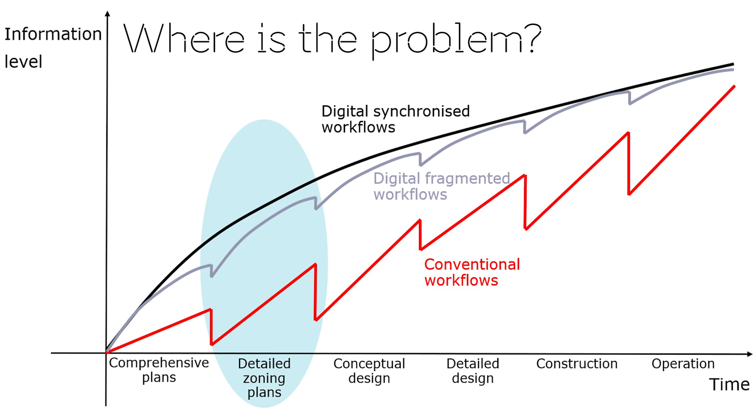And of course, somewhere there - let's see if the laser works on the screen, no - we have the building permits, we have the detailed zoning planning, etc. And how do we actually address these things?

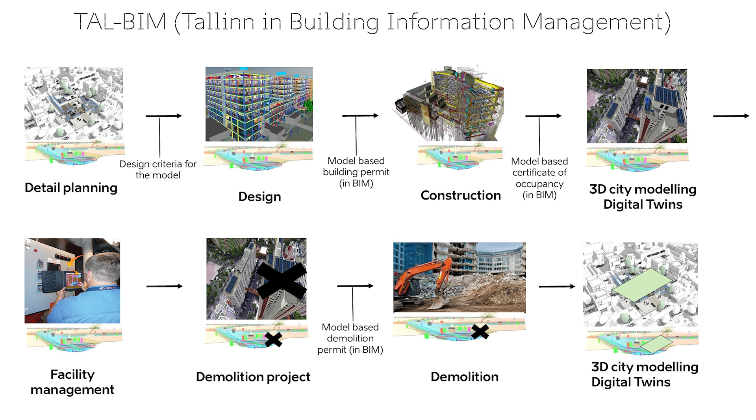For example, in the City of Tallinn, we call this process TAL-BIM. We start from the detailed planning, already using some kind of information models for this. Then when we go to the construction design level, after the conceptual design for our own buildings, we demand that these buildings get the BIM-based permit. But for buildings in the City of Tallinn that are not owned by the municipality, we cannot make this compulsory - it's like, if you want to use it, you can use it. And of course, there's the city's digital twin in place where we transfer that information, which we use for facility management, etc.

But if we go to the central government, what is the role of government? How can the central government really address this problem, address these information gaps? Of course there are the three traditional pillars: education, legislation, process improvement. But there is another solution.

For example, in Estonia we created a digital platform, what we call the e-construction platform, for better information flow. What this e-construction platform really is, is the idea and mission that we have to transfer the data, and exchange it so it's lossless, and the data itself needs to be standardized. And who benefits? All the stakeholders in the process.

So what really is the construction platform behind that wonderful idea? I'll explain it through examples where we have the data layer, the service layer, and the user interface layer.

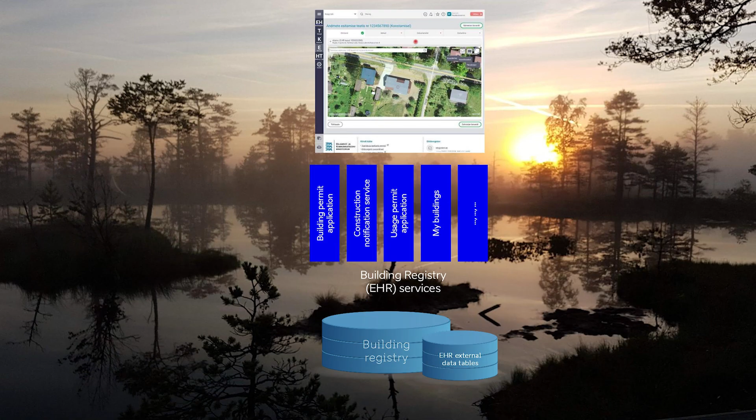The central core of the construction platform is the building registry, where we have data about the buildings and also the procedural environment of building permitting. We also have data about underground structures, and now we're putting that into 3D.

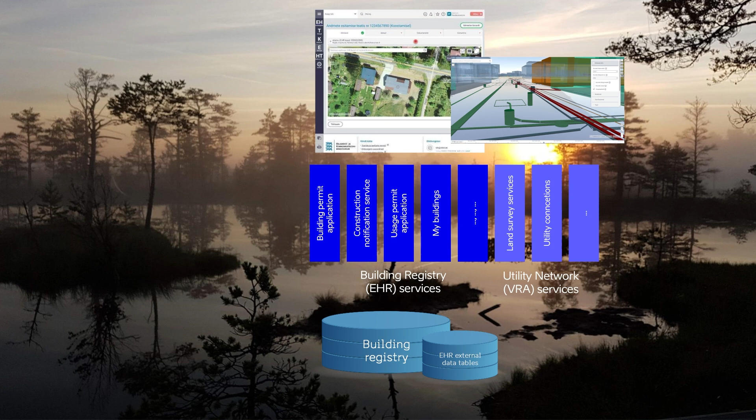Then we have BIM services like BIM-based permitting, and an entire national digital twin that we can address and access. There are a lot of different databases connected to it.

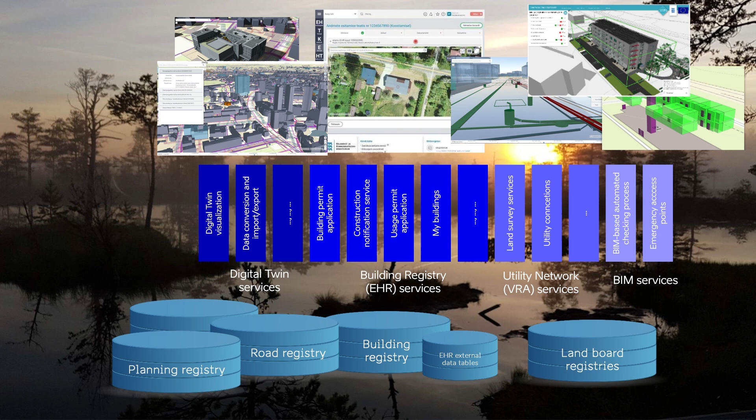We call it the X-road connection, so the data is always with its source, and it has to be like that. We're also addressing information from different fields, like from the Ministry of Finance, who is responsible for spatial planning.

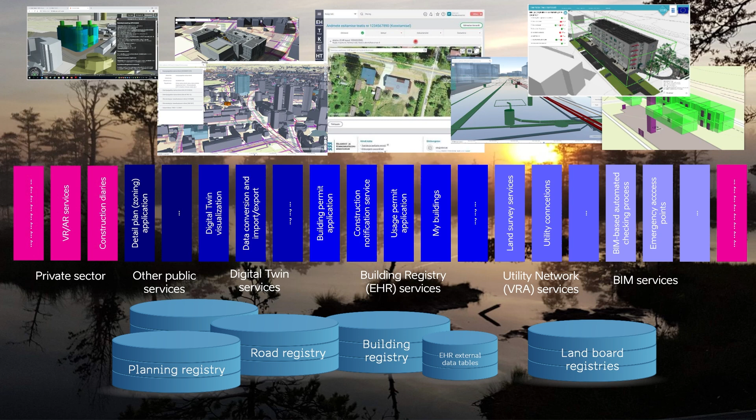We're getting these kinds of services onto the construction platform, and we're also opening the platform up for private sector services, which are very good services, but it doesn't make sense to fund them from taxpayers' money because they're beneficial for only the selected few.

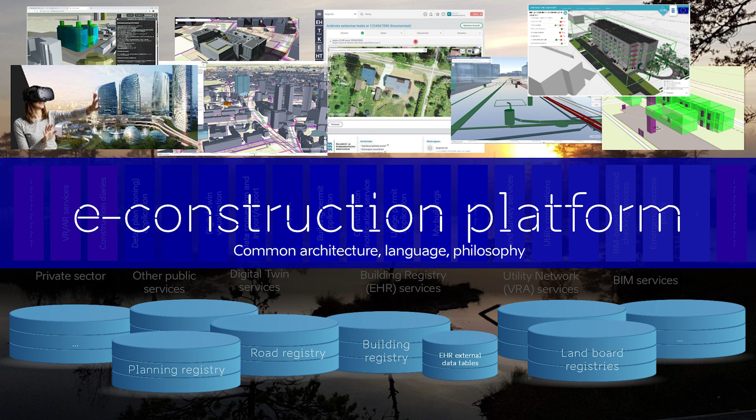So if some company wants to monetize a service, they can use the e-construction platform to do it. What this e-construction platform really is, is this kind of umbrella of different services which has a common architecture, language and philosophy, and of course the style guide as well.

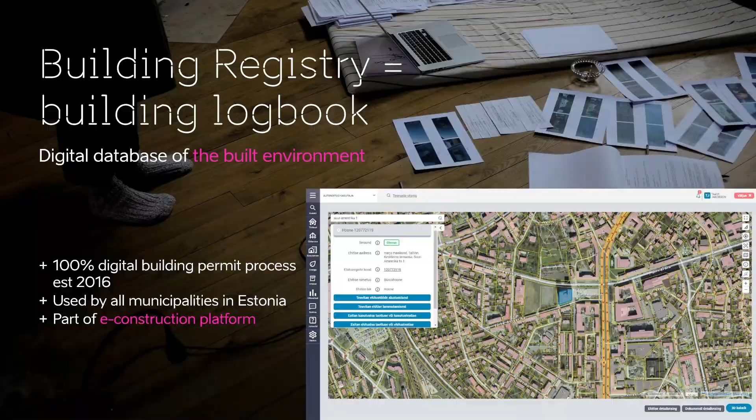But closer to the topic, when we're talking about permits, we have this e-permitting system already in place from 2016. We call it building registry, but internationally it's mostly called a building logbook. In this building registry, we also have a procedural environment so you can get building permits.

Because we have the data, we can access this data, and we also have an information portal where you can get all the statistics about these buildings.

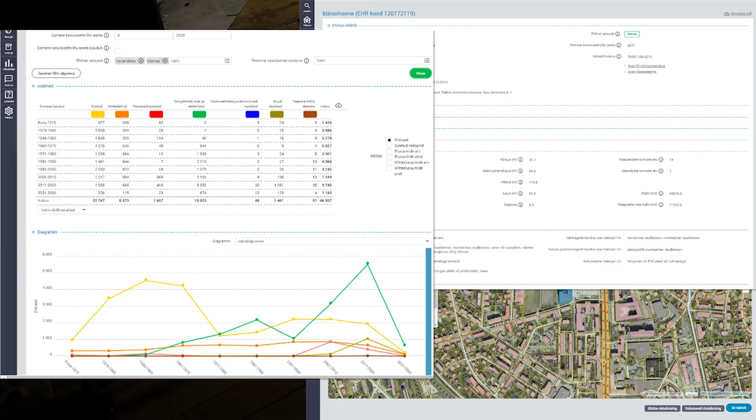So how does it really work? If you want to get a building permit, you just address the building registry. Then the local municipality who has to process the permit gets a notification, and they will start the process there.

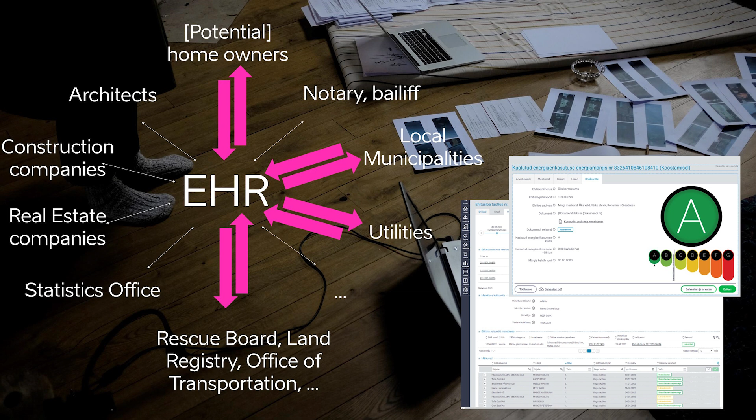They will also add tasks to the utility network owners, the rescue board, and other state agencies. They give their remarks within this environment. Then the local municipality also gives their remarks, and if everything is finally correct, you just get your building permit.

But about these building permits, why do we need them? Yes, of course, to ensure safety, legality, and efficient resource use. But it's also a key process in the building life cycle, because it's an obligatory thing you have to do.

It's not that you wake up in the morning thinking, what a wonderful day, what do I really want to do today, how about one building permit? Nobody thinks like that, of course. This is something you just have to have.

But at the moment, the process is quite expensive, time consuming, and if you want to solve it, usually it's more manpower, more money to enforce it with brute force. But there is a better way.

And what is this better way? It's this kind of BIM-based building permit process. We started with it already in 2019, and we did a first proof of concept level.

Then we developed the software with our partners, of course. We didn't have an in-house IT development team, so it all went through procurement. And from 2024, it's live, so the first building permits are already BIM-based in process.

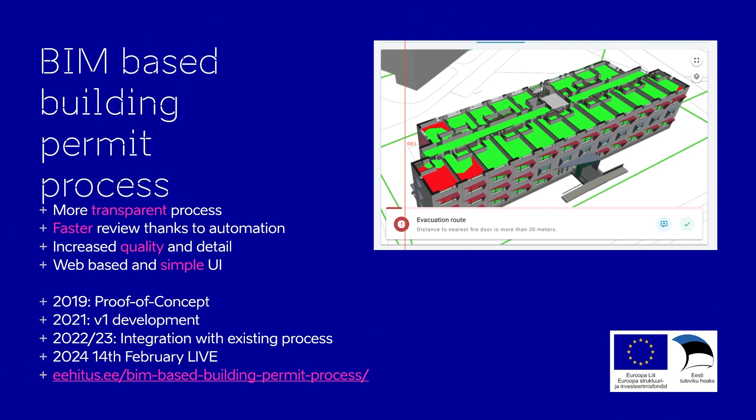There are 4 key elements: transparency, speed, quality, and simplicity. This is what we want to address with this BIM-based permitting. And of course there's automated rule checking and these kinds of things behind it.

And we are only using open standards, open BIM, only IFC. So no Revit, no ArchiCAD, no proprietary formats.

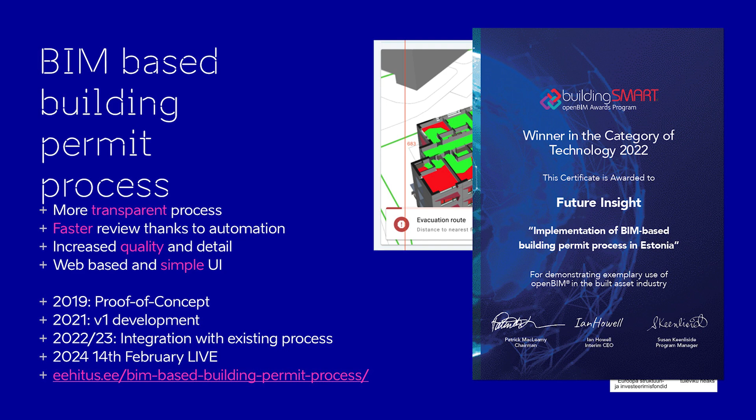This initiative was also acknowledged by Building Smart International, who gave Future Insight, our development partner, the award for the most promising technical solution in 2022.

When we want to get the BIM-based permit, we talk about this kind of automated rule checking. We also need common BIM requirements, because otherwise we cannot do automated rule checking if the data in one model is different than in another model. So we need this common language.

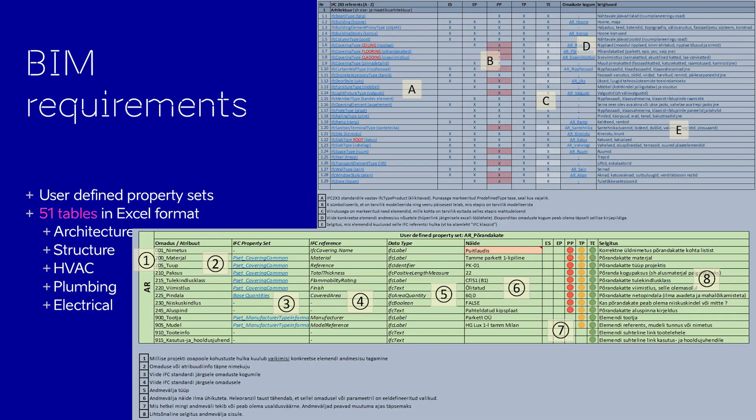For this, we have these user-defined property sets. At the moment they are still in Excel format, but we are in the process of implementing them into the IDS, the Information Delivery Specification Standard, so they would also be machine-readable. There are different parts. We have also integrated them together with the IFC standard so that, nevertheless they are in Estonian, they also have this IFC property sets and references.

This is how we can actually implement these things - if you want to get the BIM-based permit, you have to have your data according to these requirements. If you want to use different requirements, go ahead, but then you can't have this BIM-based permit, and you have to go for the traditional solution.

So about the lessons learned - what did we really learn about this process? You really need to get the right checks to start with, because when we started, we wanted to automate about 70 checks, and we ended up with 47, because some of them did not make that much sense in terms of benefits, and some were just too complicated to solve by technological means.

Also, these BIM requirements, if you are doing them, have to be very simple and clear. You always have to consider there are two sides - the designers, and the permit processors. If you're just pushing the data to the designer side, then all the time you're saving on the process side is being used up on the designer side. But there is mutual time - you have to find the balance so it would be as easy as possible.

And of course, when configuring these checks, you have to have a multidisciplinary team. You have to have architects and engineers who know what you're doing. You have to have the building permit processor to give insight into what they are controlling in rule compliance. And also lawyers and IT specialists so that all the rules are correctly interpreted. And of course, you have to keep this agile working process.

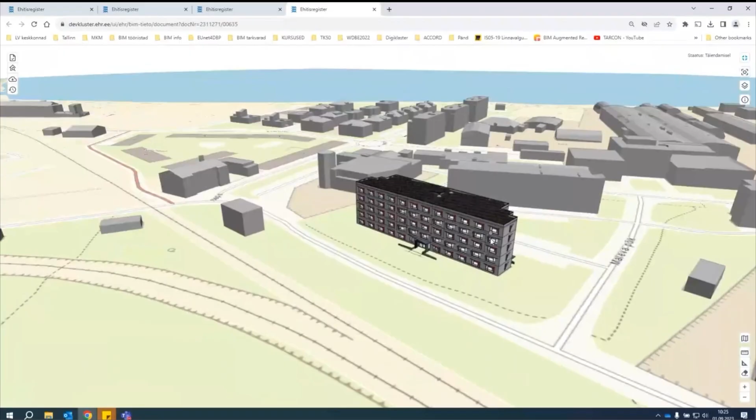Here's a quick video showing how this BIM permitting really looks. We have a model - in this example it's a 5-story building. All the background you see is taken from our national digital twin. So architects are only giving this 5-story building, and because it's geo-referenced, we get the background already from our existing data, so you don't need to recreate and duplicate the data.

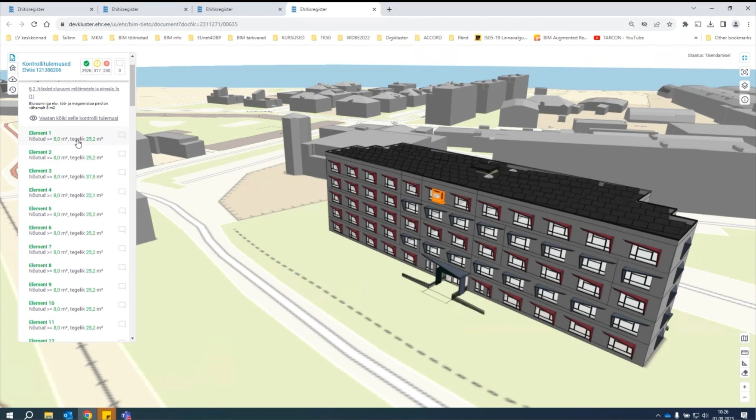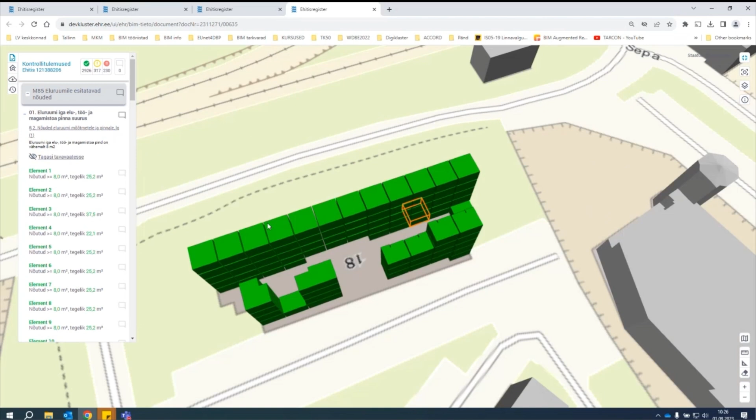About automated checking, here's a simple example of an area check. Every working room, living room, and bedroom has to have an area of at least 8 square meters, which comes from the law for housing, apartment buildings and single houses. If we have this data in the building, we can easily check it - we can see if there are any red results or green results.

Of course, with green, if you see everything green, there might still be a false positive, and this is much more dangerous than false negative examples - because a false negative shows up red, and you see it's red and think it shouldn't be, so at least you notice it. But with false positives, it's always a dangerous road, and there's no 100% solution for that.

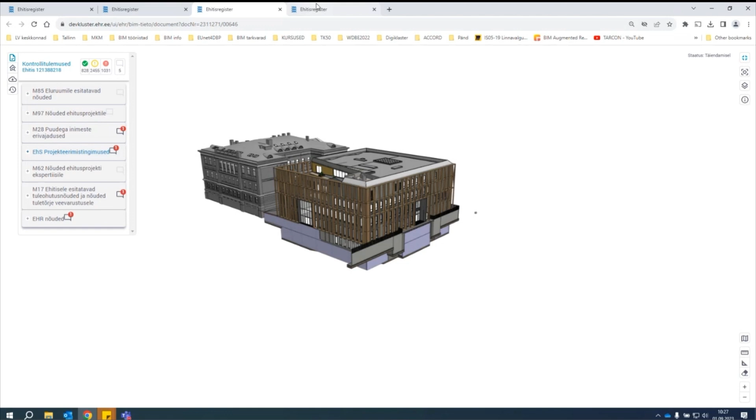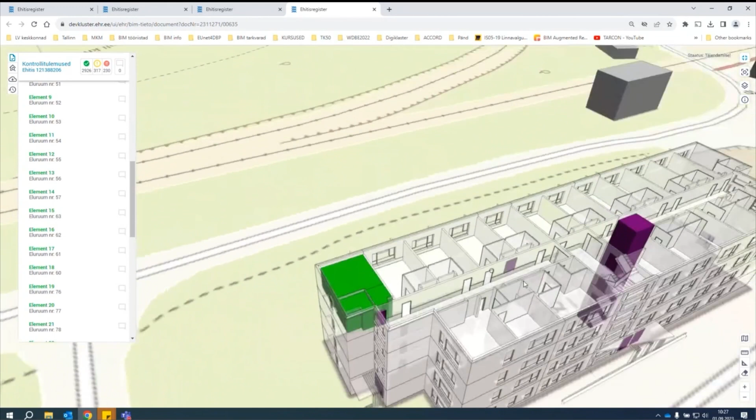The other example is on the white background - it's actually a school building, and because it didn't have the geo-reference, no background comes into the model. In a later stage we will stop adding these things, so at the moment it's just a possibility - you simply don't see the background. But we didn't want to close it down permanently, so if somebody uploads their model without the geo-reference, they can still do the checks and see the results.

Here's another example of a check - checking if an apartment situated on the 4th floor or higher from the entrance has access via an elevator. So we have to have a lot of data in that model - we have to know where the elevator is and also where the apartments are.

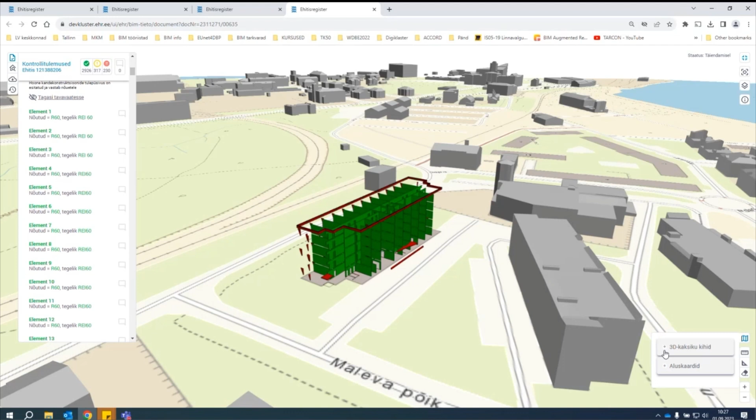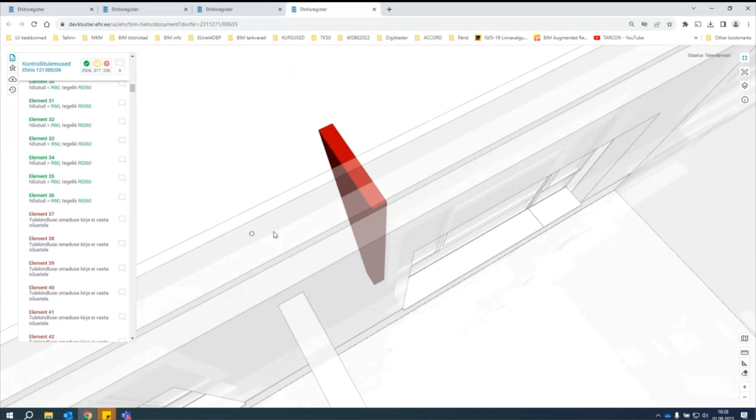Here's another example about fire safety - do all the structural parts of the building meet the fire safety requirement, the REI code, according to the needs? We see there are some red elements - actually they are false negatives, but the fire safety specialist can quite easily see the solution, so it's not that big a deal. We also have quite many fire safety checks implemented there. One thing would also be the escaping routes.

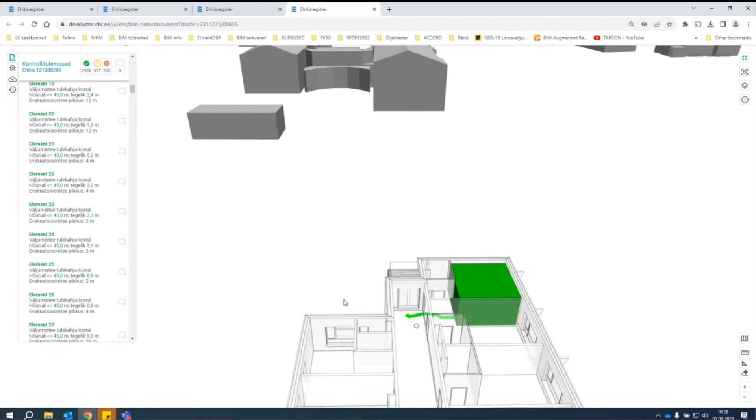So if this escape route is 30 meters or less, or 45 meters or less, this is the kind of check that the fire safety department usually has to measure from the PDFs. And when they get this information from the model, it helps them so much more.

But from that video, I now switch my talk from BIM permitting to urban planning. When we're really planning something at the city scale, we have to ask, what is the purpose? Of course, the purpose is to create the best place to live in and a desired destination to arrive to - what we call the best urban environment.

Right now it's still light, but by end of or middle of November, it's quite gray, quite dark. So when we're really planning the urban environment, we have to consider what's happening most of the year, not only the summer when everything is really nice. Let's render these nice pink blossom Japanese cherry trees because it looks exquisite - but it gives a false impression.

So still, the best environment is the purpose. What is the starting point with urban planning? We have 2D drawings, 50 plus pages of explanatory letters. The process length is not good, it's very long. The formats are not machine readable.

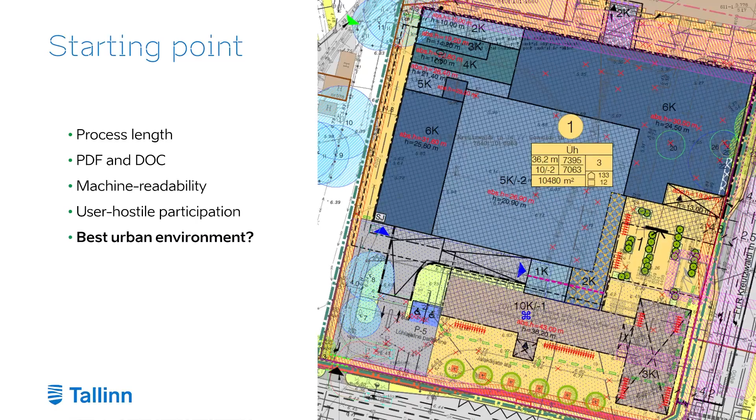But is this really how we can create the best possible urban environment? Of course not. When you look at this kind of drawing, 25% in the left corner is what is planned there, and 75% of it is just figuring out how to read this drawing. Well, this does not make sense, and this is not how we can go forward.

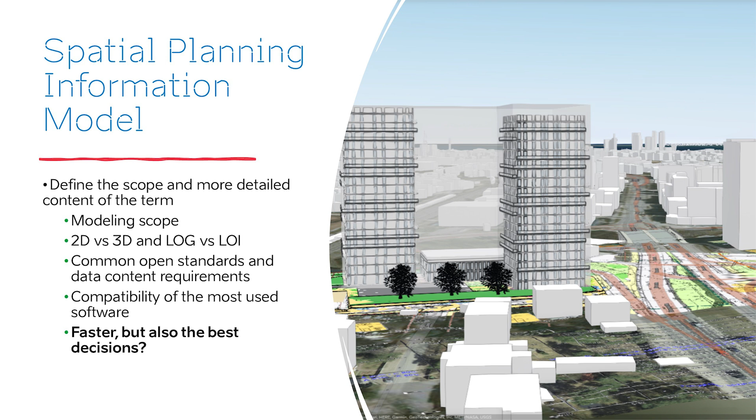But how can we do it? Well, a spatial planning information model - we will call it BIM-based planning. But BIM is for construction, and since this isn't a term everybody knows in this context - for some, BIM is 3D, but still they know what BIM is.

But when I'm talking about having the same thing in urban planning, it gets more complicated. We really have to define what this thing is. And then we started piloting in the city.

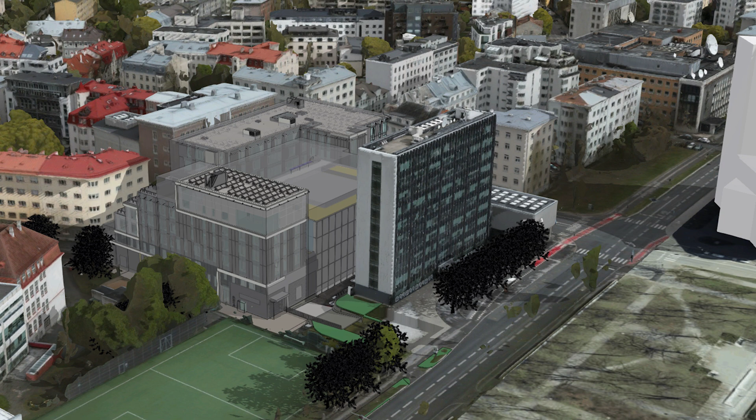So before you saw the drawing, now this is the same area - this is what we are actually planning there. We have the architectural sketch, we have the volumes, we have the new trees that are going to be there, some greenery layers, etc.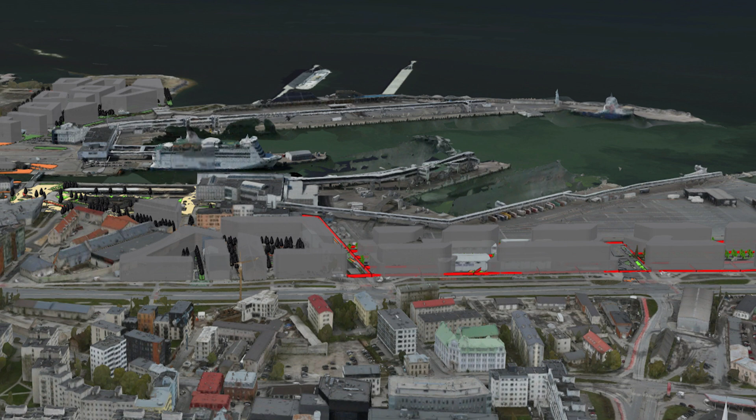And then we broadened the scope so that in the Tallinn Harbor area, there are several detailed zoning plans at the moment in process. And how can we really see this existing environment and the future environment in 3 dimensions plus the data.

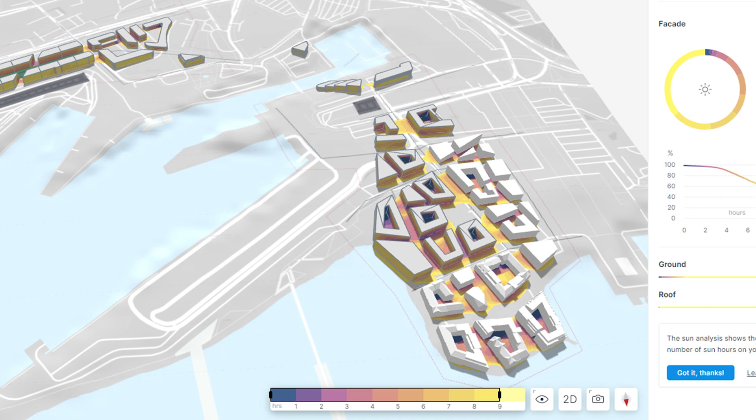Because there is the data, we can do the analysis already - the insolation, how much sunlight these buildings will get, what is the noise impact on these buildings, what is the wind impact on these buildings. And because of these things, we can make decisions so early that have a crucial impact on the process, because at this stage, the price for these decisions is so much smaller than later in the project stage.

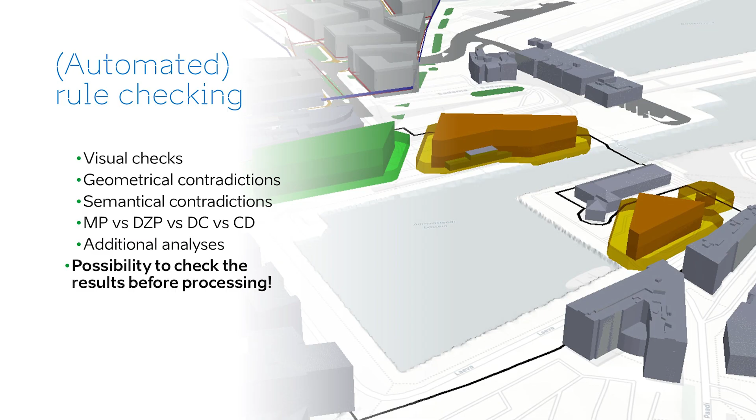And of course, about the automated rule checking, I will show it in the video how it actually looks like, because again we did this kind of proof of concept. So again, we are in the Tallinn City Harbor area.

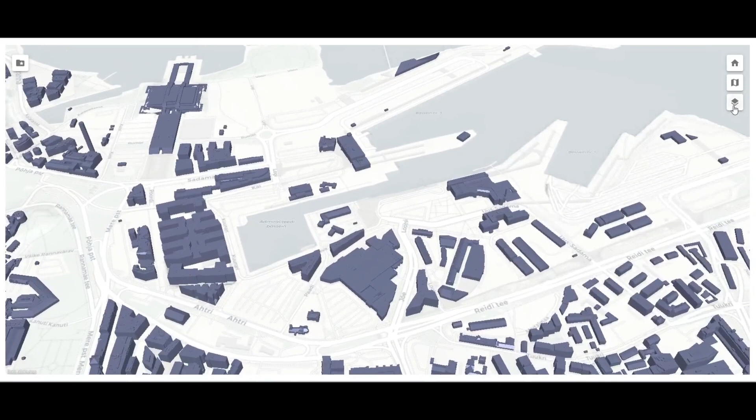Then for the background, we can just switch on and off our existing models that come from the national twin. And then we have their different WMS, WFS services, for example the points of interest. Then we can have all the restrictions that come from the utility networks.

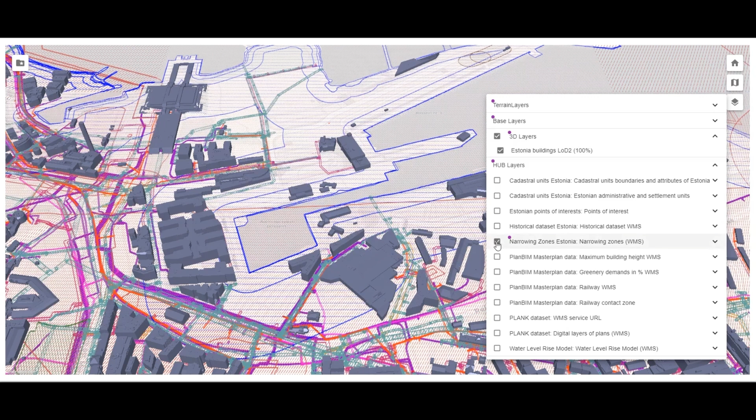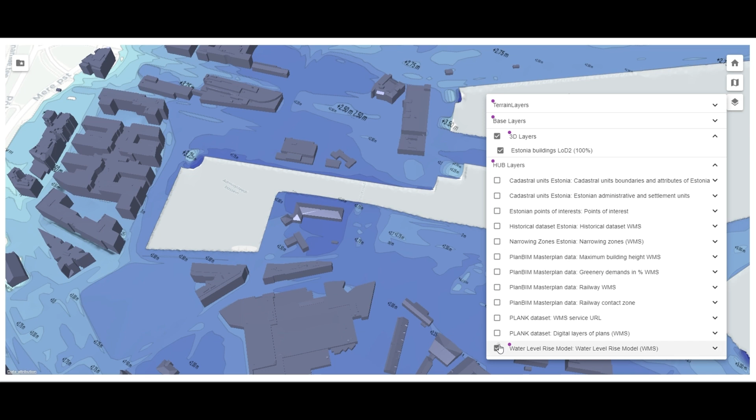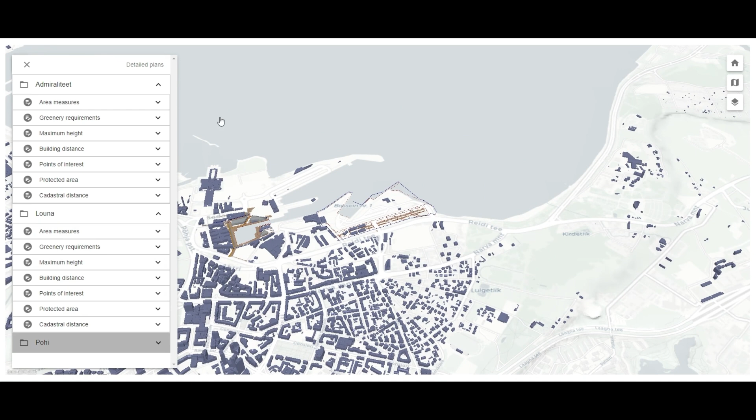Then again, we can have this kind of situation, what's happening regarding the sea rise level, how the situation be with flooding, and all these kind of services. And now we want to implement the information models from the planning. So there are 3 examples in this proof of concept: the different detailed zoning plans that are in the process.

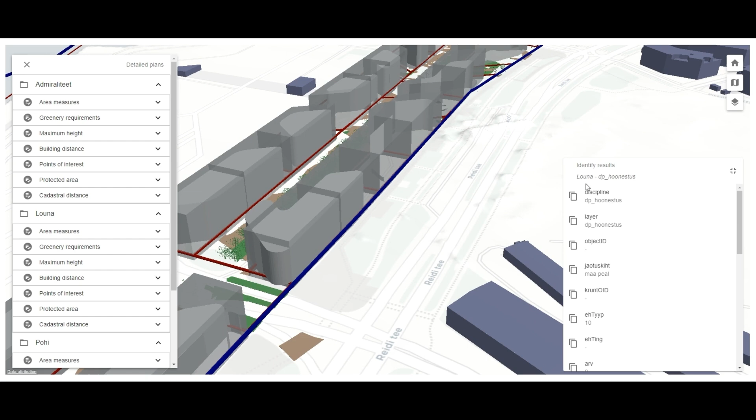And with these kind of things, even visually, without the automation, we can see this cohesion, how these areas are interacting with each other much better than just comparing layer on top of layer PDFs that you zoom in, your computer starts lagging, you go get a cup of coffee, come back and see okay, I still have to restart and start from the beginning.

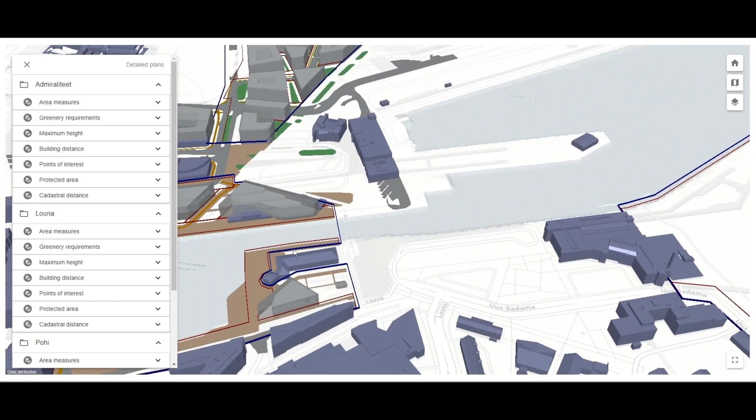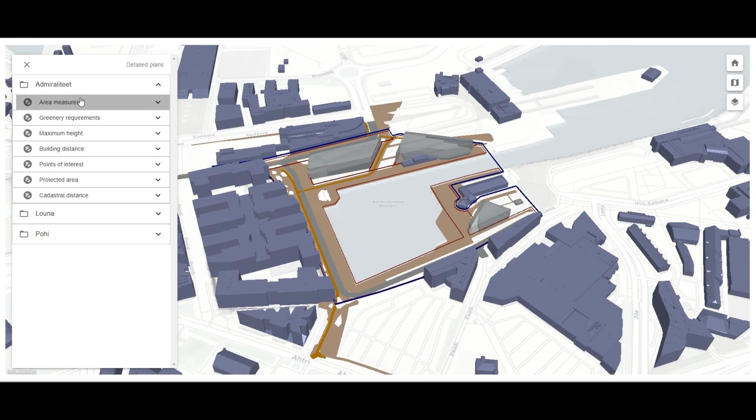And with these kind of models, we also did different automated rule checkings, 7 of them actually, to get this information quicker so you don't have to search for it, and you see the quality of your design.

So first of all, this kind of simple area check - how much transportation area, how much buildable area, how much greenery, where is the gap. We see there is a huge gap in the drawing.

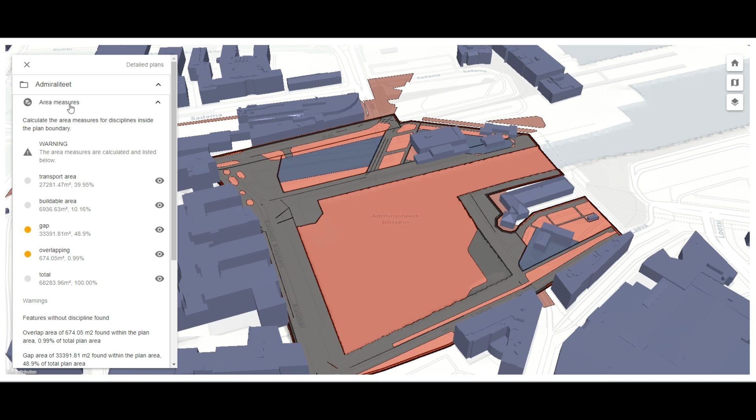And also the overlappings, because sometimes the layers are on top of each other. And if we are creating this model and these layers are on top of each other, we can get this overlap information.

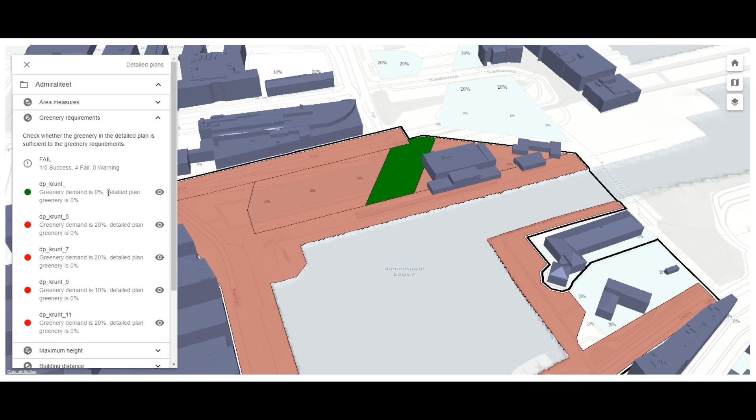Then again, the greenery requirements - by the master plan at least 20% of greenery of every plot in the detailed zoning plan is required, we can get this information very quickly. Is this greenery provided or not? Also, the buildable areas heights.

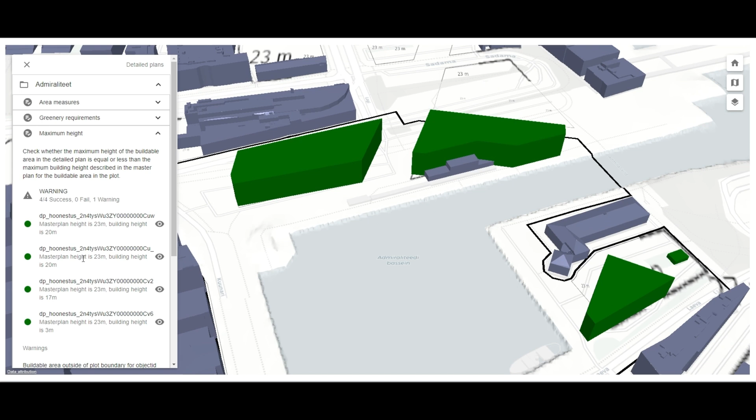From the master plan, it comes as 23 meters for this area, and we can see that there are 2 buildable areas for 20 meters and 1 for 17, 1 for 3, so everything is okay.

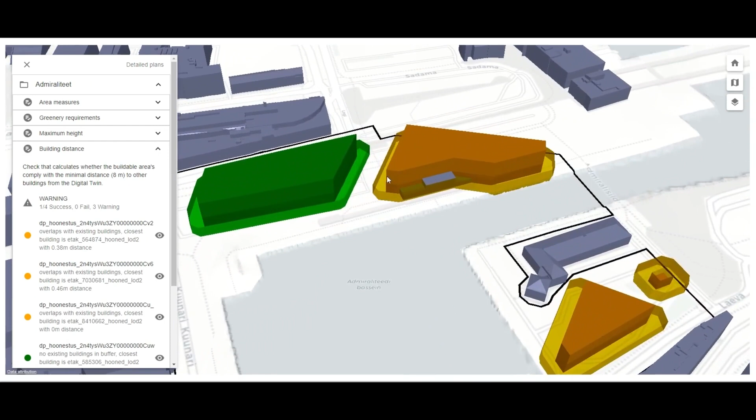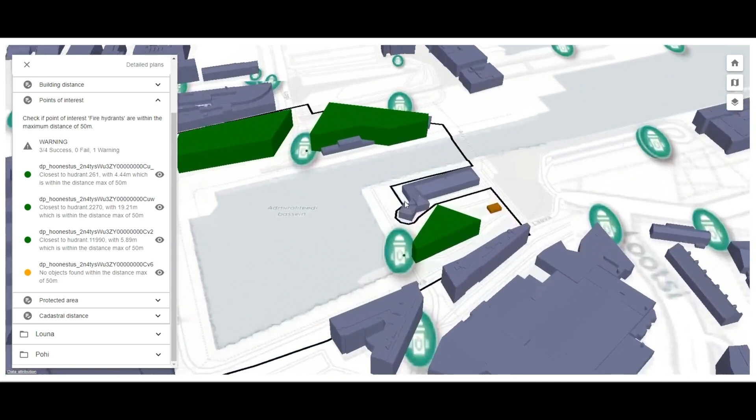Then another check would be the distance of the buildings or buildable area from existing or planned buildings. At the moment we have this 8-meter distance, so of course you can go nearer, but then you have these fire safety requirements you have to consider, and if you have the space, then you can already do it without considering them, because it takes some money.

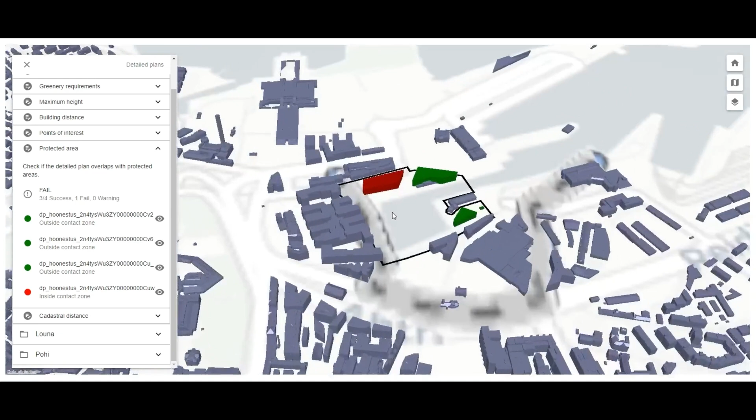And here there is a distance from some kind of point of interest. Here we took the fire hydrant, but you can have whatever point of interest, distance from the bus stop, distance from the school, distance from the kindergarten.

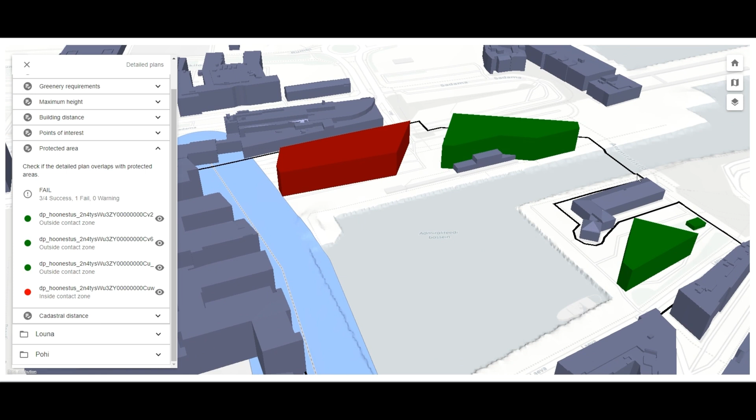And here is an example of the conflict area. At the moment, one buildable area is touching the railway protection zone. Of course, in real life, we don't have the railway there, we just inserted it so we can showcase these kinds of things. By the naked eye, you wouldn't see this kind of conflict, but because it actually happens, you can see that you can't have your buildable area there.

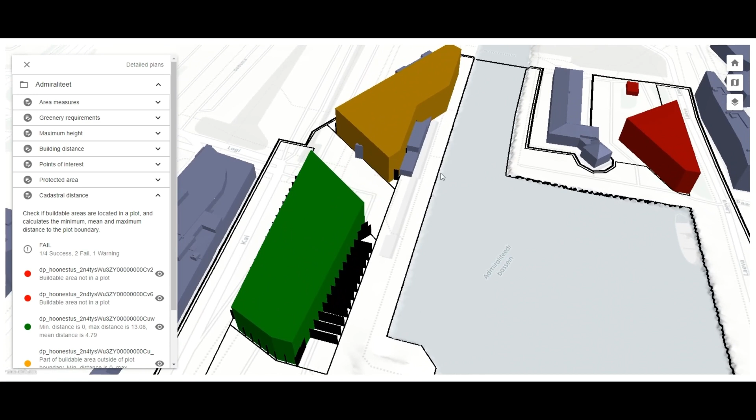But again, you can have these conflicts with the heritage protection areas, the flooding areas, which are not errors but warnings. They're warning you, yes, you can build there, but maybe in 50 years your house is below the water. Or yes, you can build there, but because of heritage protection requirements, it's going to cost you 3 times more, if you shift your building a little bit, it's not anymore in the area.

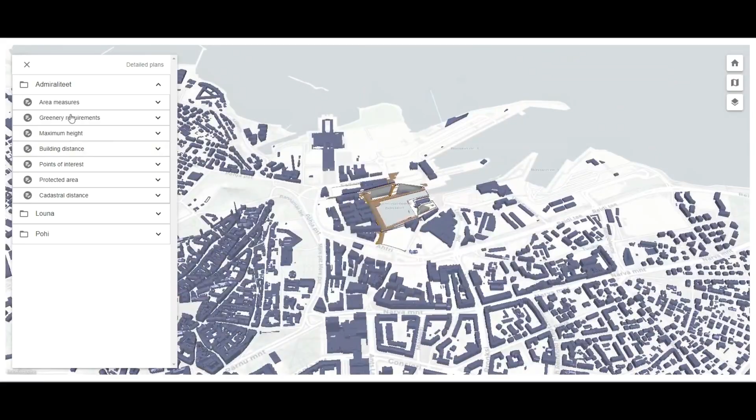And here also the buildable area distance from the cadastral border, since most municipalities in Estonia have requirements that you have to have at least 4 meters from the border. There we can see that, for example, one building was stretching the plot and 2 buildings didn't even have the plot around them. So you can get this kind of quality information quite quickly that you might miss.

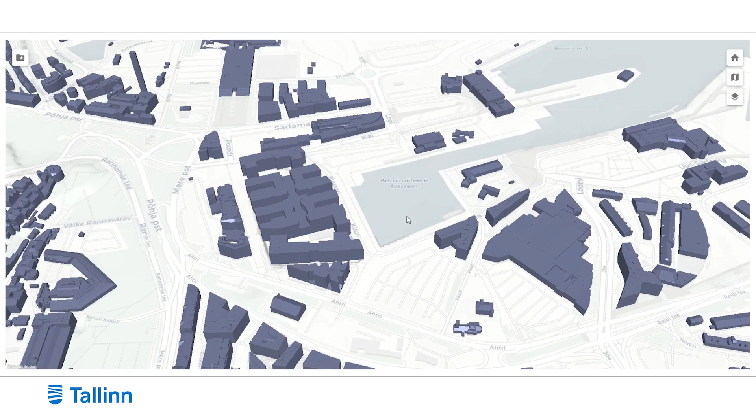Doing it as human checks, the manual checks, are error prone. And if you discover something already when there have been several years of this process, then they need to change it. And they say time is money, but actually it's not true, because you can always print more money - European Union is doing it, USA is doing it, everybody's doing it. But I haven't seen the time printer yet, so time is more valuable than money.